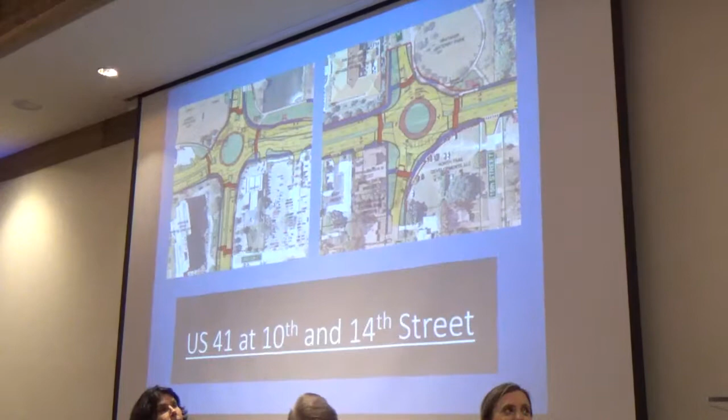Okay, let's go to the next slide. I'm going to start going through the various projects we are pursuing in partnership with the city and the MPO, starting from the north side at 10th and 14th. Before I go forward, we're also pursuing a project development study at Myrtle and MLK intersections. It's underway, but not as advanced, so I can't show concepts yet. I'm going to start at 10th and 14th.

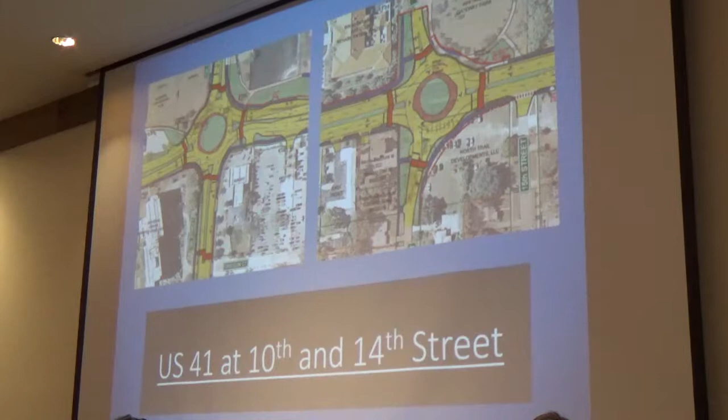So the intersections you're seeing here are at 10th and 14th. We finished the planning study, finished the PD&E, finished the design, got the right-of-way, and we're under construction. This particular construction project is about 2 years long. However, the reason it's 2 years long is it's got major drainage improvements that need to be done, major utility impacts with a lot of utility relocations, and it's a very involved project from a maintenance of traffic perspective, because constructing roundabouts while maintaining traffic is a very difficult endeavor. We really cannot close US 41 to build these roundabouts, so it's a very lengthy process to construct them.

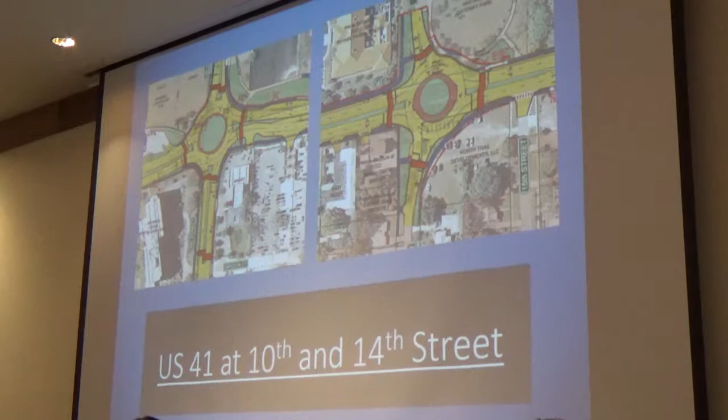The other thing I want to mention is there were some concerns about pedestrian crossings. We've talked about what the pedestrian crossing treatments were going to be during the project development stage and the design stage, and we're going to be meeting those particular expectations. We're going to live by those commitments.

At 10th Street, all 4 crosswalks are going to have what we call hybrid beacon treatment. And on 10th Street itself, there's a mid-block crossing connecting these condominiums to the public side, and that one also is going to have the same type of treatment. Hybrid beacon. What is a beacon?

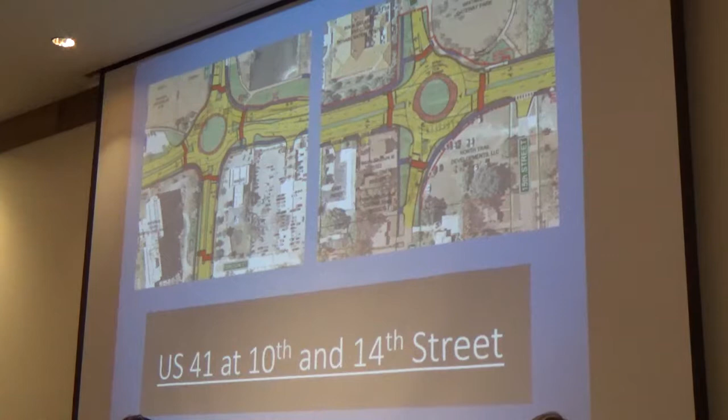I have a video on what it's like and how it's going to operate. It's in the middle of a full-blown traffic signal and a flashing beacon. It provides adequate protection for pedestrians, and you'll see that in the later part of the presentation. At 14th Street, there's going to be hybrid beacons with the pedestrian crossings across 41, but across 14th Street we're not going to have any treatment because they're single-lane crossings. We don't need any treatment for those crossings.

Okay, next intersection is going to the south. It's US 41 at Fruitville Road. We are in the process of preparing a PD&E study, or project development study, like I mentioned.

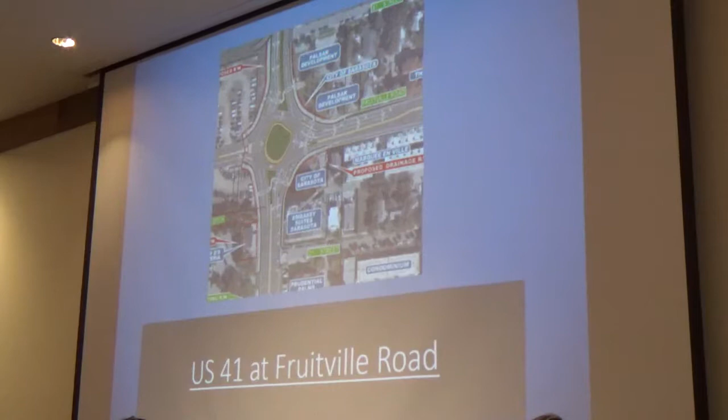We held the public hearing on October 26th, which means we're about at the end of the project development environmental study. We're also working with the Quay folks on the other side, who are preparing the design plans and working in partnership with the city and the state to build that roundabout through a permit. That means we will give a permit to the private entity and they will build the roundabout when schedules allow.

Okay, this particular roundabout, Quay is on this side, Fruitville Road - that's Quay, that's Fruitville, and that's US 41.

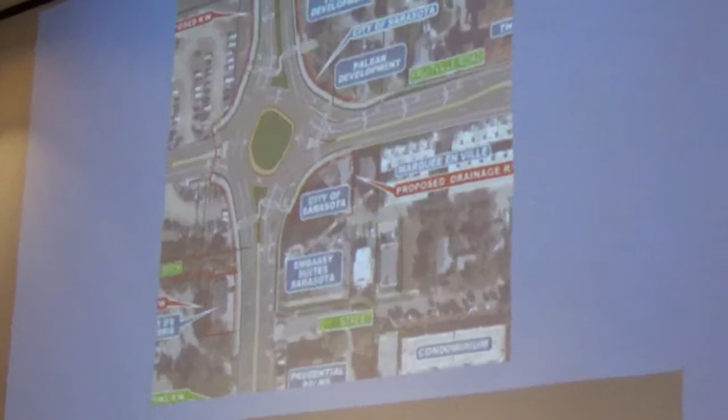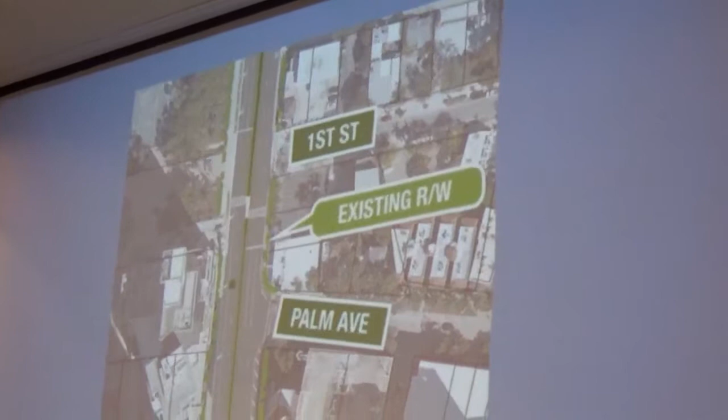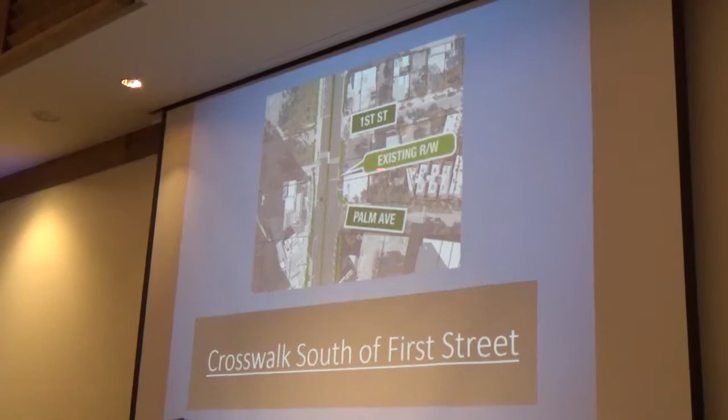This particular location is the mid-block crossing right south of First Street. As part of the resurfacing project that's ongoing, we've done a study to determine what the pedestrian demand is crossing at that location, and we found that crossing demand is pretty heavy. So we came up with a plan to install the pedestrian crossing at that location with the resurfacing project, and this crossing with the hybrid beacon treatment is going to be installed in the next 4 weeks. Sometime the 2nd or 3rd week of April, within that time frame, the crosswalk is going to be installed. Right, Albert? Yep. Okay.

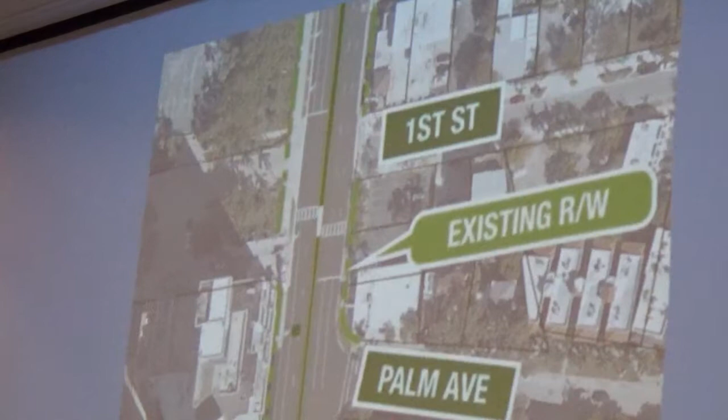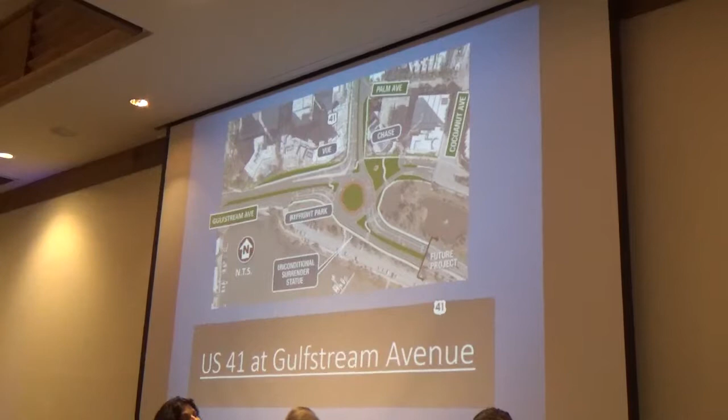This particular location is at Gulfstream. So this is Gulfstream, I think we are about here, and that's 41. There was - our original concept actually included a 4th leg coming from this side, but based on the input we received from the condominium residents in this area, we re-evaluated and had conversations with the city and went back to the configuration that we currently have.

So this roundabout is going to be a 3-leg roundabout with just this movement, which will actually allow for folks to go through, which is what we currently have. Okay?

So the public information meeting is going to be held on March 27th. And the PD&E phase, the project development phase, is going to be completed by summer 2018, this year. The design is ongoing - our plan is to complete the design by summer 2019, within a year from now. Then we're working on a funding plan with the city to make sure construction funding is available so we can go for construction, or let a contract, towards the end of the year. Those conversations are still ongoing.

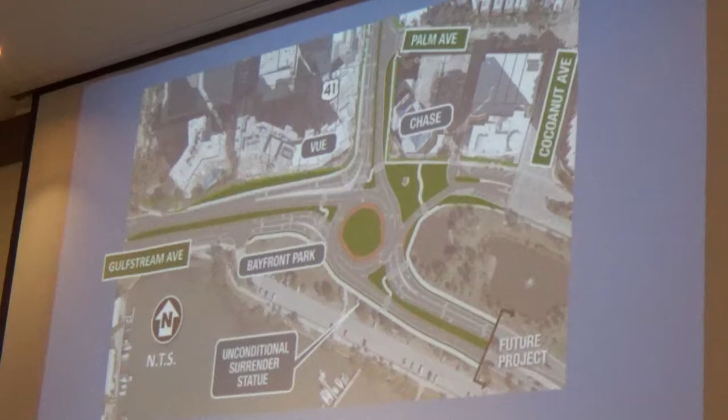This particular project, we just finished a workshop, which is Main Street and Ringling. We're handling these 2 intersections as part of one project, like 10th and 14th, because of their proximity. We have a project development study ongoing - we had a workshop in December of last year, and we'll be going through this process, with the public hearing tentatively scheduled for spring of next year.

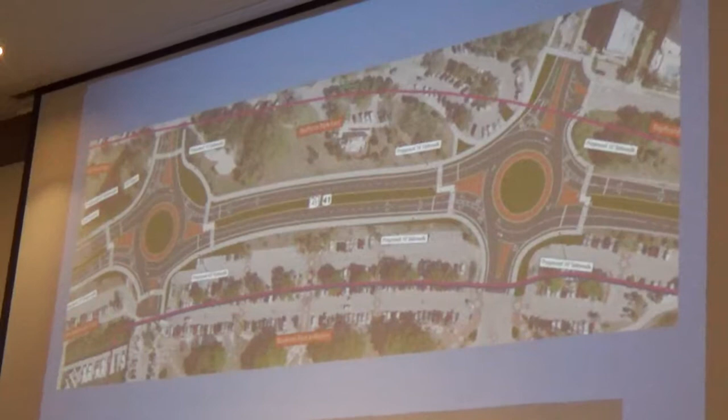Now, when so much activity is happening within a small area, public information becomes a very critical component. So throughout the projects, as we go through these cycles, we are holding public information meetings and public hearings through the PD&E and design phases, and even in construction. If you want more details about these projects, visit our website, www.southwestfloridaroads.com, and look for projects that are under construction. You'll get details about 10th and 14th Street, and information about other roundabout projects in progress - all the information is there.

Now, I talked about the hybrid beacon, right? So we got a small video - hopefully it will work.

All right, let me figure this out. There you go. There you go.

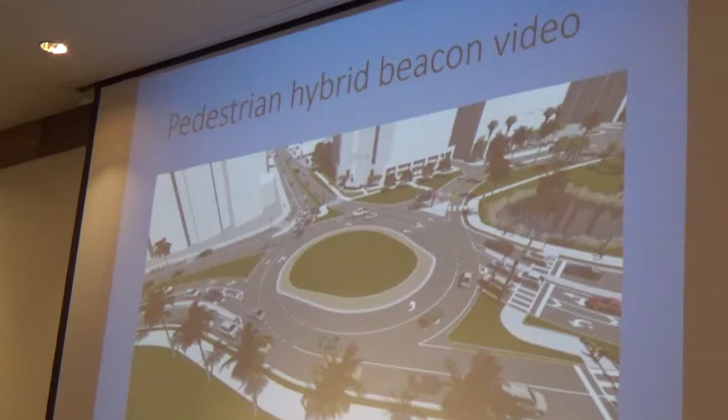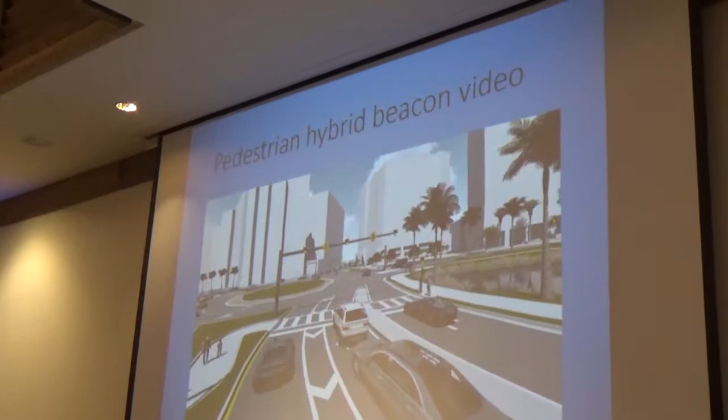Roundabouts are known to reduce speeds along the corridor and improve pedestrian accommodations. However, for multi-lane roundabouts, a pedestrian-activated warning device is sometimes needed to ensure that motorists are aware of pedestrians in the crosswalk. This type of warning device is commonly referred to as a pedestrian hybrid beacon.

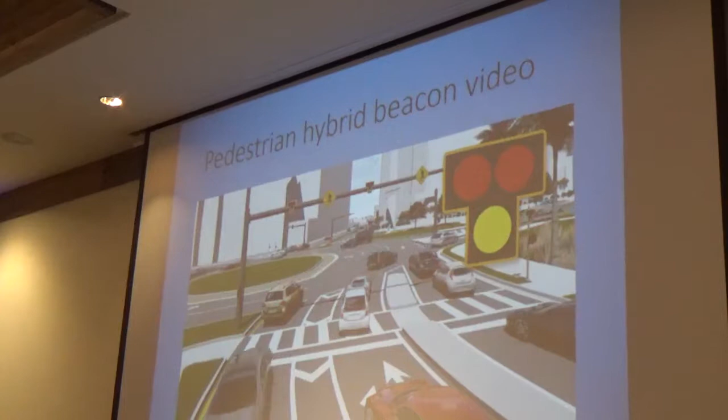A pedestrian hybrid beacon helps to ensure the safety of pedestrians and minimize traffic delays since they are only activated when a pedestrian pushes the button to cross. This signal is made up of three lights: two red lights located above a single yellow light.

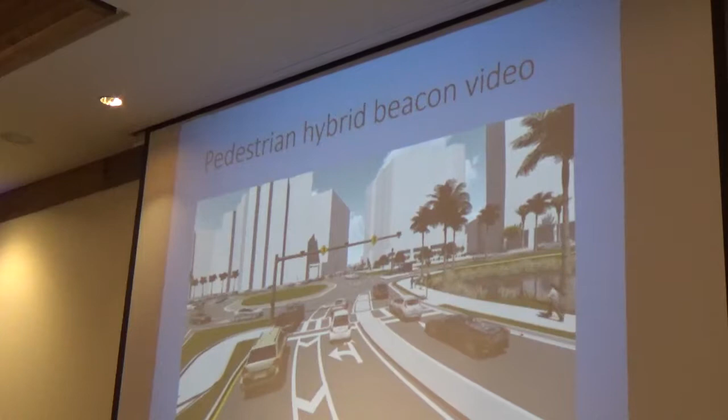If you are a motorist approaching a crosswalk controlled by a pedestrian hybrid beacon, here's what you need to know. If the light is off, continue to proceed as normal, but remember to yield to traffic inside of the roundabout. If the light is flashing yellow, slow down, as a pedestrian has pushed the button. You can still proceed through the crosswalk as normal.

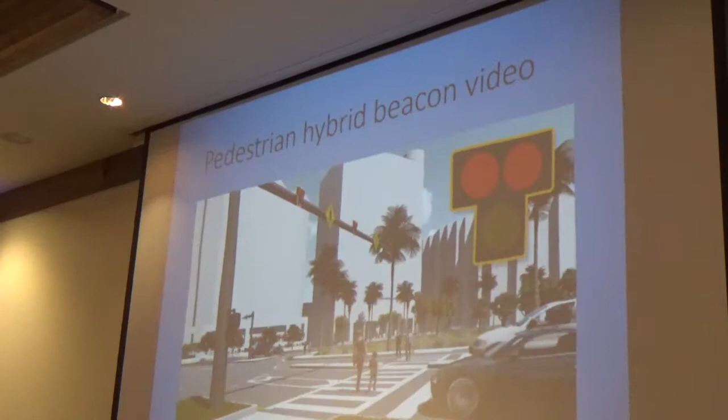When the light turns solid yellow, this is a warning that the light is about to turn red. Be prepared to stop. When the light is solid red, you must stop to allow pedestrians to cross. Afterwards, the light will begin to flash red. This means you must stop, but can proceed if the crosswalk is clear. The light will then go back to off until activated again.

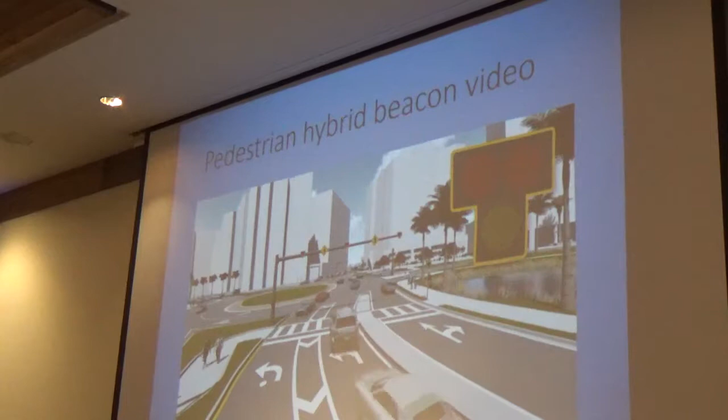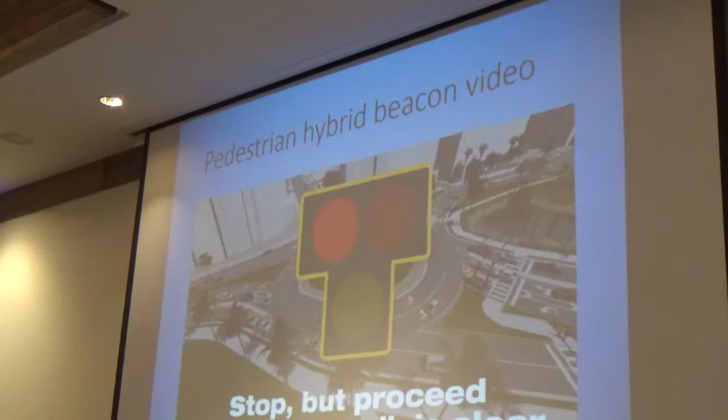Remember, a yellow light is a warning that the light is about to turn red. A solid red light means you must stop. And a flashing red light means you must stop, but can proceed if the crosswalk is clear.

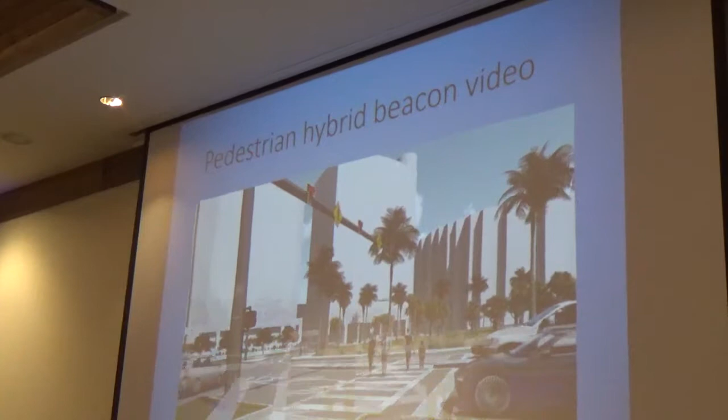For pedestrians, it's much like a crosswalk at a regular signalized intersection. First, press the button and wait for the signal to cross. Don't cross if you see the solid red hand, and only start to cross when indicated to do so. Make sure to stay alert to traffic and stay within the marked crosswalk.

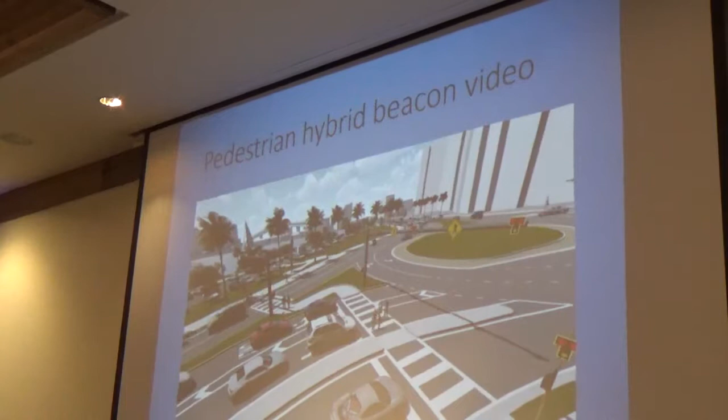For roundabouts, a pedestrian hybrid beacon only stops one direction of travel at a time. When you reach the median, press the button again to activate the pedestrian signal to safely cross to the other side of the roadway.

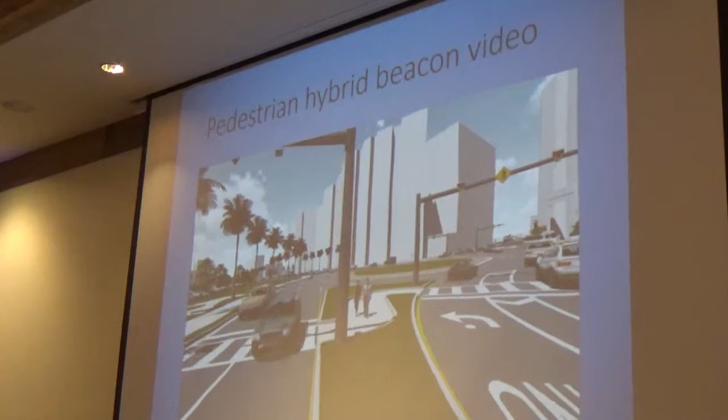I hope that video is clear, because there's another slide which actually goes through the different steps, and I'm not going to go through that. All right, that's the slide.

Not only do we have project-specific information, we also have generic roundabout information that we developed, which talks about how to use a roundabout, a single-lane roundabout, multi-lane roundabouts, with different videos for different aspects of the roundabout treatment, like how pedestrians should use the roundabout, bicyclists use the roundabout, drivers use the roundabout. It also talks about how trucks are accommodated in roundabouts. Everything is included on that particular website, so if you're interested, go to southwestfloridaroads.com.

We also realized that since we started construction at 10th and 14th, and we are moving forward with the different locations, we will be developing an outreach campaign where we will individually come to the different condominiums and make presentations. We'll be working with the city to do that, because the key is we want you all educated on how to safely cross the roundabouts. At the same time, we're going to use the press to educate others, the motorists, on how to use roundabouts, so that we can get everybody educated on using roundabouts.

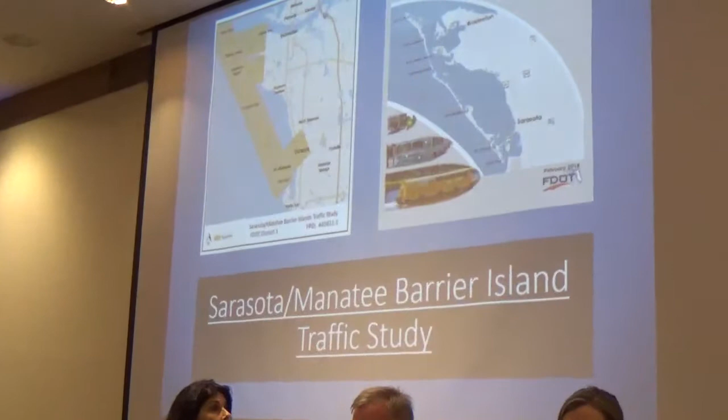The next item I wanted to talk about is the Sarasota-Manatee Barrier Island Traffic Study. MPO requested us to perform this study and look at measures to manage congestion on the barrier island, and see if we can come up with short-term and long-term improvements to address congestion on the barrier island side.

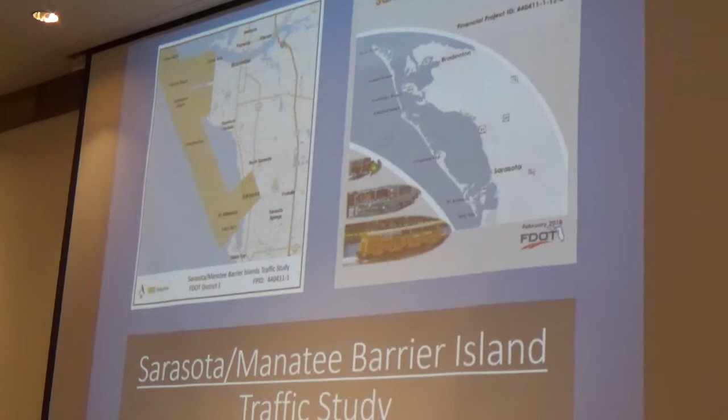This particular study was supposed to be a three-phase study. First phase is doing a planning level analysis, looking at existing studies with the recommendations, then doing data collection and analysis to identify short-term and long-term improvements. Phase three is to basically vet those particular improvements that came about and then look at an implementation plan.